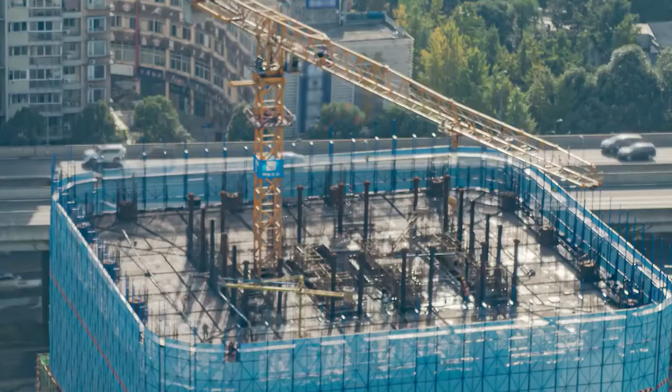Consider for a moment the organizational chart and the responsibilities of these projects, and you will see how these relationships become even more complex. Owners' increased need for tight financial control and quick project turnaround, coupled with concerns about the rising cost of litigation, are contributing to a change in the way these roles relate.

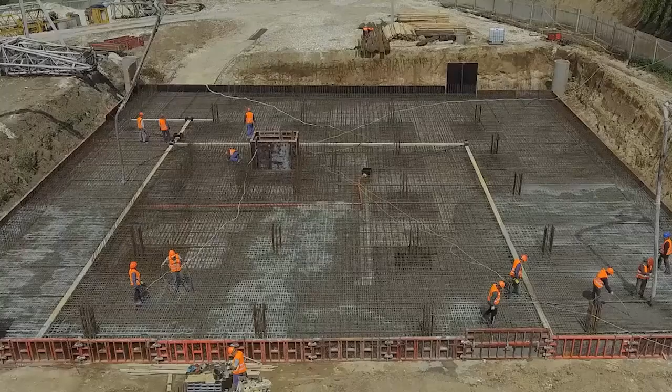So let's take a look at and try to break down each of these participants, and let's begin with the dreamers. These are the people who see a road where one never existed, a new ballpark, or a home to raise a family. Let's start with the owner.

Owners can be individuals seeking a home for a growing family, a large organization responding to a change in technology, a municipality seeking to improve its infrastructure, or a developer working to make money by filling a perceived market. The motivation to build is as varied as the profile of the individuals and companies seeking to build. Whatever the motivation, the owner is where the project is formed.

After identifying the need, the owner's most important function is to financially back the project. Otherwise, there can be no project. The source of that financing partly defines the type of participants on the project.

Over a quarter of the construction in the United States is done with public money. That money can be from local, state, or federal sources, but in all cases, the owner is the taxpayer. Because these agencies represent the public, they must follow specific methods of managing the project.

Public approval processes have to be figured into any schedule or budget. Designer and constructor selection processes are carefully spelled out. Negotiation of claims is well defined, as well as the payment of all invoices. There are special pressures on the team that is designing and building publicly funded projects.

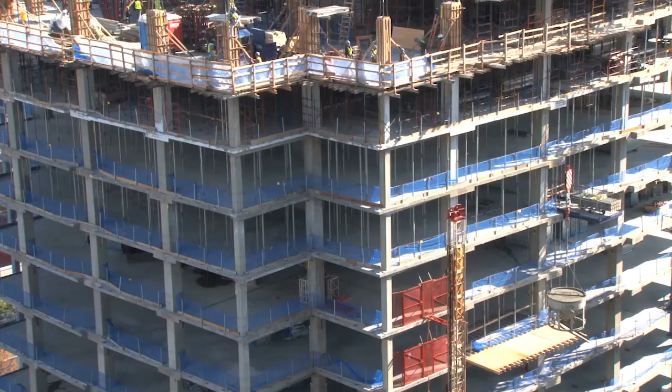Owners represent a specific interest during the project's life. While designers focus on functionality, aesthetics, and innovative use of materials, owners are concerned about the durability of the design, storage and availability of materials, simplicity of operation, and ease of maintenance.

Constructors are concerned with maintaining the schedule and budget through efficient methods of assembly and improved management techniques. Owners are additionally concerned about a turnover process that ensures a complete understanding of all systems in the new facility and a smooth startup transition.

This focus can put them at odds with other members of the project team who are very narrowly focused on the design and construction. In the best of teams, these diverging interests form a creative tension that encourages all members of the team to incorporate the interests of the owners as their own.

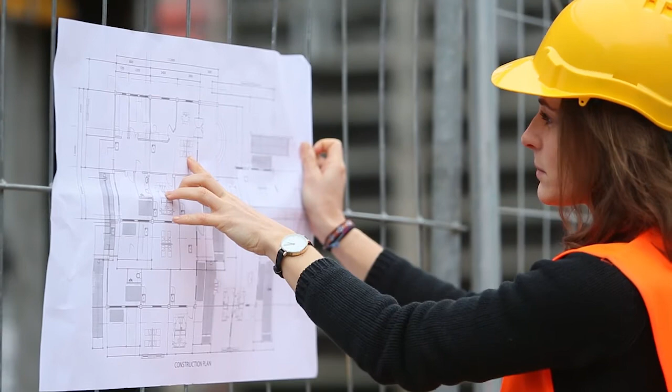Architects and engineers are the principal designers of construction projects. On most building and residential sector projects, the architect is the lead designer, laying out the concept on paper with the owner. The engineer is usually brought in after the basic concept is worked out, but before the details are developed. The engineer designs the building systems, structures, as well as mechanical, electrical, and plumbing systems.

On infrastructure and industrial projects, the lead designer is usually the engineer. The architect is brought in to work on the aesthetics. As an example, on a refinery project, the engineer designs the mechanical, electrical, and structural systems, while the architect handles the office spaces and the building color schemes.

Each professional contributes to projects in different ways. When architects are given a design challenge, they respond by first identifying the important elements of the design. For some architects, the physical context is the guiding feature. Others are guided by the activities that will occur in the building, and others still will focus on creating a unique image. Very good architecture responds to all three aspects.

The process is intuitive and subjective. Architects become known for personal styles they developed over the course of their careers. Some architects tie their work to historic styles. Others are more modern in their expression. They are hired to express those particular responses.

An engineer's approach to design is much different from that of an architect. Engineers tackle a challenge objectively, breaking it down into identifiable components and a series of questions to be answered. When engineers are the lead designers, the functional aspect of the work takes center stage.

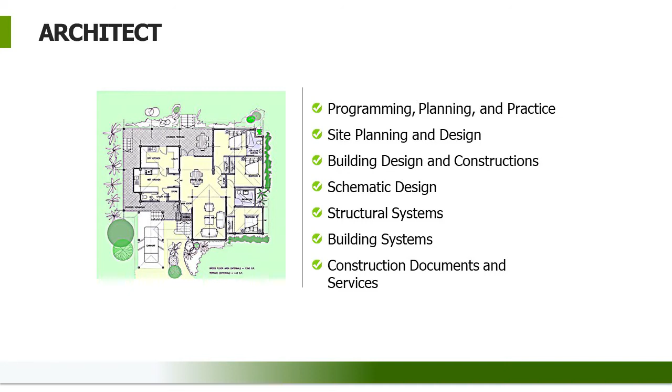Architects learn their trade through many years of training. There are bachelor's, master's, and even PhD programs. There is also a number of years a young architect must apprentice before they can take the architectural exam. The architectural exam requires an individual to show competency in many areas of construction, including programming, planning, and practice, site planning and design, building design and construction, schematic design, structural systems, building systems, and construction documents and services.

The field offers many opportunities. Architects can choose to practice as part of a large firm, a small partnership, or independently. They can specialize in one building type, as an example, residence, healthcare facilities, universities, sports and recreation facilities, or museums. The list is extensive. In addition to practicing architecture, licensed architects have other alternatives, working in other fields such as

owners' organizations, government agencies, teaching, marketing, and sales. Architects are usually the principal designers on building projects, but many other professionals contribute to their work, including specification writers, computer-aided design operators, interior designers, and landscape architects. These specialized professions developed as the tasks facing architects became more and more complex. Sometimes, especially in larger firms, those professionals are employed full-time by architectural firms.

In other cases, they work independently and are brought in as consultants as needed. In addition, these professionals can have their own independent practices and can be brought in by clients to work directly as principal consultant. When brought in as a consultant, an architect may be hired for any one of the following positions: lead architect, draft person, BIM operator, specification writer, interior designer, and landscape architect. Therefore, it is obvious that being an architect can lead to many roles within the construction environment.

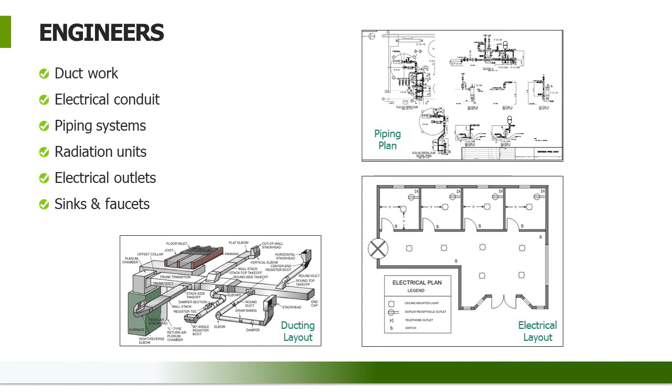Then the engineer must lay out the necessary distribution, ductwork, electrical conduit, and piping systems. They must also specify and locate termination devices such as radiation units, electrical outlets, and sinks and faucets. Because their work is detailed, communication within the design team is critical. Adjustments are ongoing in the design to accommodate the dimensional requirements of the building systems, and sometimes the work of an engineer can influence large shifts in the design approach.

Engineers are regulated by professional licensing requirements that include a 4 or 5-year college degree, a specific number of years of experience, and the successful completion of 2 exams, one being the Fundamentals of Engineering or FE exam and, after proper documented experience, the PE or Professional Engineering exam. The PE exam is typically divided into 2 sessions, the breadth exam and the depth exam.

As an example, the Mechanical Engineering exam is divided as follows: Basic Engineering Practice, Mechanical Systems and Materials, HVAC and Refrigeration, Hydraulics and Fluid Systems, and Energy and Power. The depth exam would include principles, statics and dynamics, and applications such as components, joints, and fasteners.

Engineers, like architects, have many career options. The most common are found in the construction industry, and they include structural engineer, mechanical engineer, electrical engineer, civil engineer, and surveyors. As you can imagine, and as you have probably seen, architects and engineers have different skill sets, and therefore differing opinions when it comes to priorities on the job. The person responsible for bringing them together is usually the constructor.

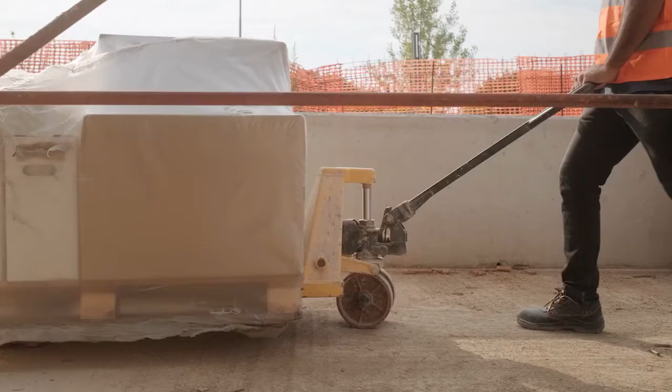From the time the first pencil is laid to paper in the design process to the completion of shop drawings and coordination drawings, the goal is to instruct people who actually perform the work. These are the tradespeople. The number of trades needed on the job has grown with the complexity of the projects.

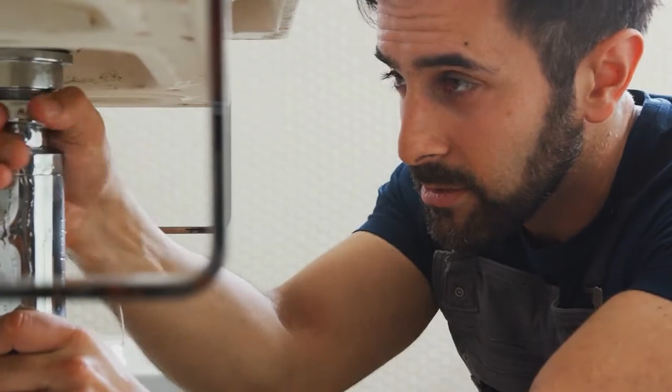Where once there were electricians, there are now also specialists in telecommunications and security. Where once there were plumbers, there are now also pipe fitters and sprinkler contractors. Most construction processes require specialized training. On complex building sites, as many as 15 different trades may be working on a given day.

The opportunities in the construction trades are almost unlimited. The U.S. Department of Labor lists the following job categories for construction trades: boilermakers, brick mason, block mason, and stone mason, carpenters, carpet, floor, and tile installers and finishers, cement masons, concrete finishers or segmental pavers, and terrazzo workers.

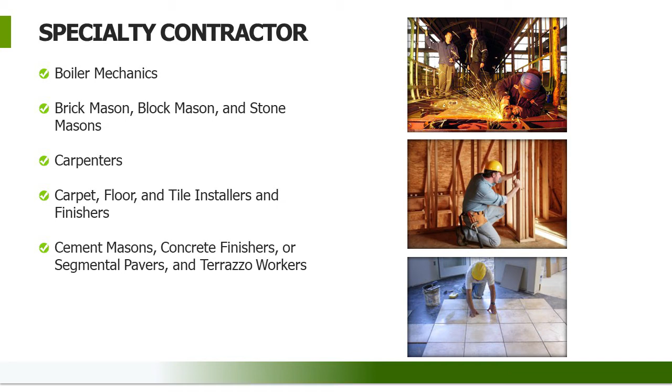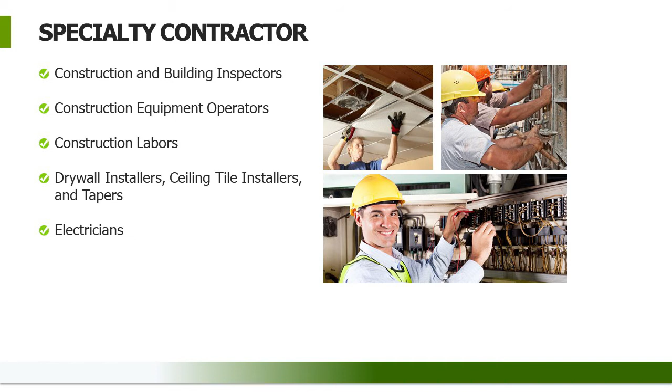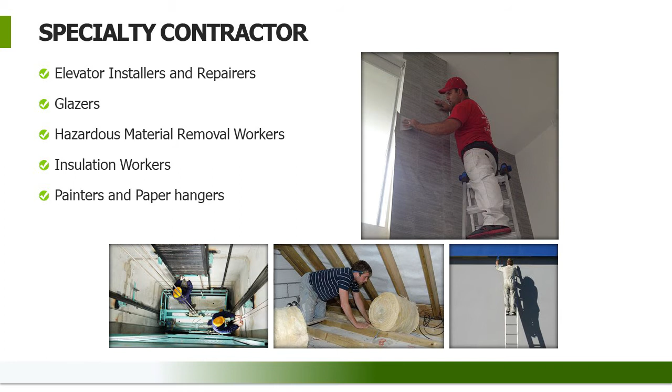Construction and building inspectors, construction equipment operators, construction laborers, drywall installers, ceiling tile installers, and tapers. Electricians, elevator installers and repairers, glazers, hazardous material removal workers, insulation workers, painters and paper hangers.

And finally, well, you get the idea. To practice the craft is to create a legacy for generations to come, manipulating materials, assembling parts, creatively using knowledge and skill to create better conditions for people. These are all part of practicing a trade.

At the end of the workday, an observer can see how those hours were spent. At the end of the job, there is something new for others to enjoy, sometimes for generations. Few jobs offer such tangible measures of success and enjoyment.

A project may have talented designers, innovative constructors, and wealthy, sophisticated owners, but without materials to build with, the project would be only a drawing.

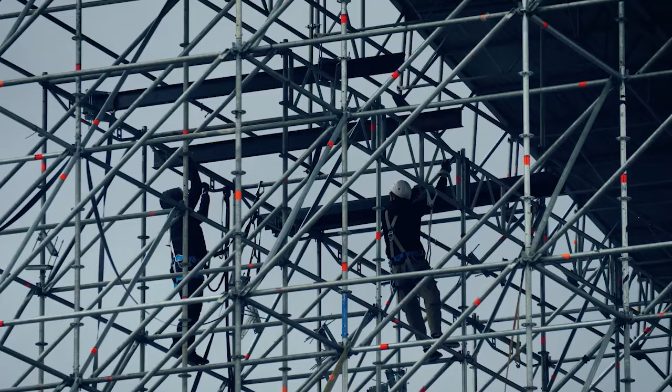Materials and building components are manufactured, fabricated, and installed by suppliers. A user's choice of material is based in part on performance, durability, and aesthetic appeal. But without the help of the suppliers and their trade associations, architects and engineers would be daunted by which materials to specify, and constructors by which methods of material assembly to use.

To promote their industry and provide information about material characteristics, suppliers have formed trade organizations that establish a level of quality for each product and standardize certain characteristics, such as dimensions or strength. The American Plywood Association is a trade association, as are the American Concrete Institute and the National Electrical Manufacturers Association.

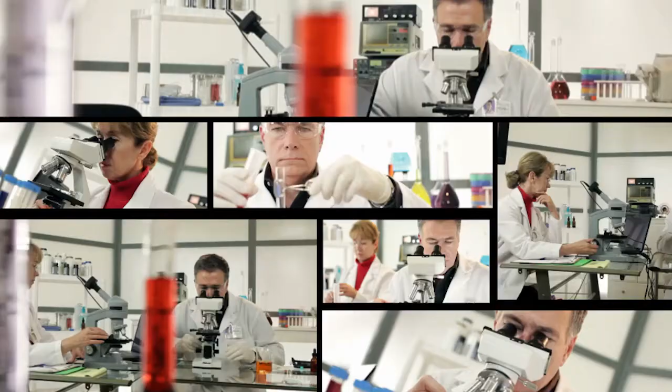Manufacturers of materials that fall within their categories support these groups. Through research, the association develops criteria that members then agree to use. To ensure the criteria have been followed, the associations provide oversight methods using seals of approval or some other mark, such as a stamp. Although they have no regulatory function, trade associations and their standards are often developed with other groups, such as the American National Standards Institute, ANSI. These standards are often incorporated into architectural specifications, government regulations, and building codes.

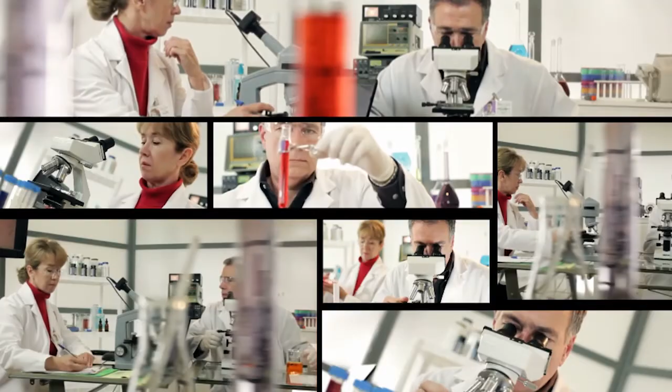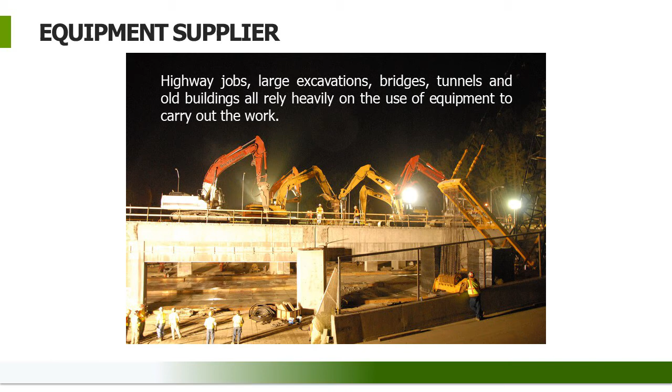Depending on the project, equipment can play a very big role in construction. Highway jobs, large excavations, bridges, tunnels, and old buildings all rely heavily on the use of equipment to carry out the work. A major difference between equipment and material is that equipment does not become part of the project when complete.

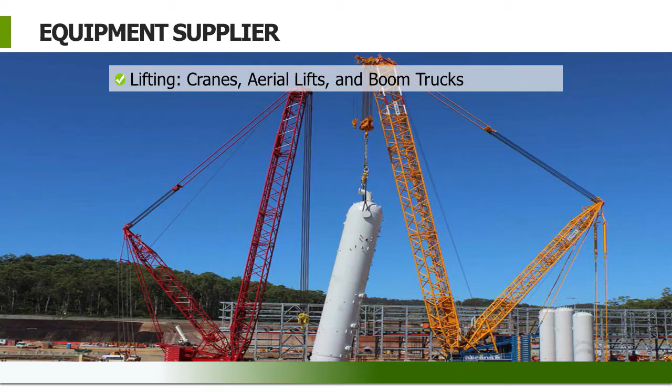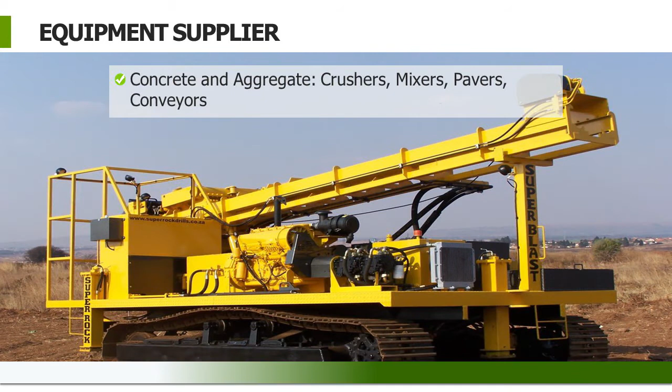Equipment types break down into six loosely defined categories: earth-moving, such as excavators, loaders, and trenching equipment; lifting, such as cranes, aerial lifts, and boom trucks; light equipment, items such as generators, pumps, and compressors; bituminous machinery, such as planers, asphalt pavers, rollers, and soil stabilizers; concrete and aggregate equipment, including crushers, mixers, pavers, and conveyors; and other components such as buckets, blades, and demolition tools.

Behind all the people who interact directly with the construction is a host of other people who are deeply involved in the project. Before a project even starts, many issues must be resolved.

Financing is certainly one of the biggest issues. Where the money comes from, how the funding is set up, and the terms and conditions of the funding all play a direct role in how the project will be managed. Many financial institutions are involved in funding construction companies, and some of the funding may come from government agencies as well.

Certain public agencies are interested in the project from a regulatory perspective. They have the authority to rule on the conditions of the building and can deny the right to build if the project is deemed not in the public interest. These agencies include zoning boards, planning boards, historical commissions, and building code officials, all locally administered and controlled.

The roles of design and construction firms are certainly different, but because both participants are project-based, they have some similarities in the way they are organized. Both types of companies are internally organized to support technical people such as marketing managers, accountants, information systems, technical support, and human resource personnel. For instance, a marketing manager's position would be described in a similar way in both companies, varying only in details.

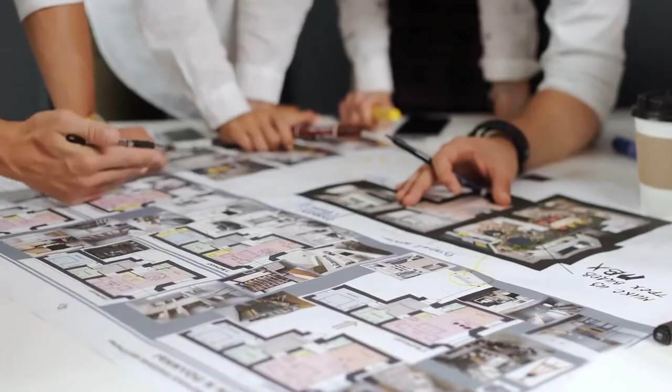So let's finish this presentation by talking about great job captains. The Roebling family as a group can be credited with building the Brooklyn Bridge during the period of 1869 to 1883. It was the greatest project of its time and required the use of technology at a scale never before tried. The concept of a cable-supported suspension bridge was literally invented by John A. Roebling.

Roebling was a man of tremendous energy and powerful intellect. He built a number of suspension bridges, most notably the John A. Roebling Bridge in Cincinnati, which is still in daily use today, that demonstrated the cable-supported concept prior to designing the Brooklyn Bridge. Upon his death, which was precipitated by an accident that occurred while surveying the Brooklyn Bridge location, his son Washington took charge of the project.

Washington Roebling was a decorated hero of the Civil War who had received his training in civil engineering at Rensselaer Polytechnic Institute. Like his father, he was a man of great vision and courage. He refined the concepts of caisson construction and solved numerous problems as the great towers of the Brooklyn Bridge began to rise above New York City.

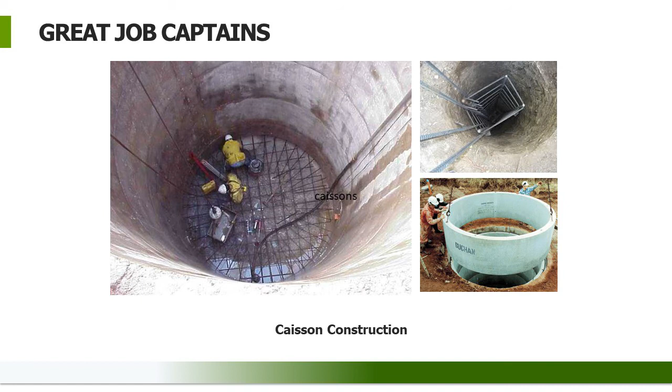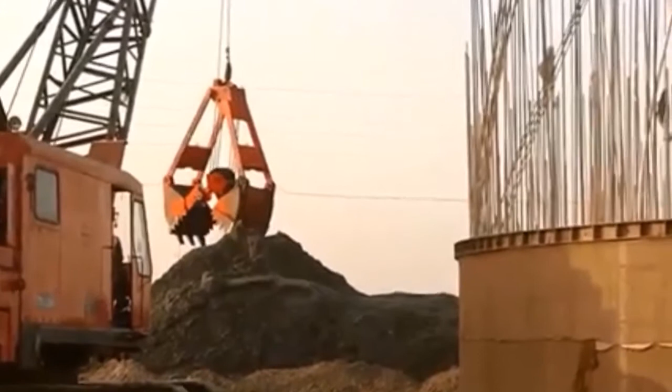Washington did not allow anyone to work under unsafe conditions. Therefore, he entered the caissons and supervised the work personally. He ultimately suffered a mysterious illness related to the fact that the work was carried out under elevated air pressure in the caissons. Today, that illness is called the bends, which was caused by the absorption and rapid exit of nitrogen from the bloodstream when workers entered and exited the pressurized caissons. This is the same illness that scuba divers have to be concerned with when diving.

Although incapacitated, Washington continued to supervise the work from his apartment that overlooked the site. At this point, Emily Roebling, Washington's wife and the sister of an Army general, entered the picture. Emily carried information to the supervising engineers on the site. She became the surrogate chief engineer and gave directives in the name of her husband. She was able to gain the confidence and respect of the entire construction team and was instrumental in completing the project.

Another great accomplishment was the Panama Canal. The end of the 19th century was a time of visionaries who conceived of projects that would change the history of humankind. Since the time that Vasco Núñez de Balboa crossed Panama and discovered a great ocean, great planners had conceived the idea of a waterway or a link between the Atlantic and the Pacific Ocean.

Having successfully connected the Mediterranean and the Red Sea at Suez in 1869, the French began work on a canal across the narrow Isthmus of Panama. After investing almost a decade into the project, the French were ultimately defeated by the formidable technical difficulties, as well as the hostile climate and the scourge of yellow fever.

During this period, Theodore Roosevelt became President of the United States. His administration decided that the canal project must be completed. Using what would be referred to as gunboat diplomacy, Roosevelt precipitated a revolution that led to the formation of the Republic of Panama. Having clarified the political situation, Roosevelt then began to look for the right man to construct the canal.

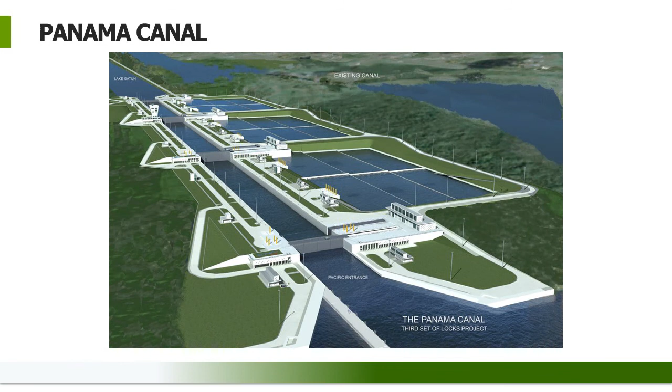The construction of this system of locks presented an enormous challenge, particularly on the Atlantic side of the canal. The situation was complicated by the presence of the wild Chagres River, which flowed in torrents during the rainy season and dropped to a much lower elevation during the dry season.

Stevens' qualities as a great engineer and leader were on a level with those of Roebling's. As an engineer, he understood planning must be done to provide a climate and environment for success. Based on his railroading experience, he knew a project of this magnitude could not be accomplished by committing resources in a piecemeal fashion.

Stevens took the required time to organize and mass his forces. He also intuitively understood the problem of disease had to be confronted and conquered. Stevens was able to be decisive and was not held in check by committee or bureaucracy back in Washington.

But then he did something no one expected. He resigned. Having set the course for what would ultimately lead to the successful completion of the Panama Canal, Stevens abruptly resigned. It was never quite clear as to why he decided not to carry the project through to completion.

President Roosevelt did not take the resignation well and reacted by appointing a man that Roosevelt said could not resign, an Army colonel and West Point graduate named George Washington Goethals. Goethals had the managerial and organizational skills needed to push the job through to successful completion.

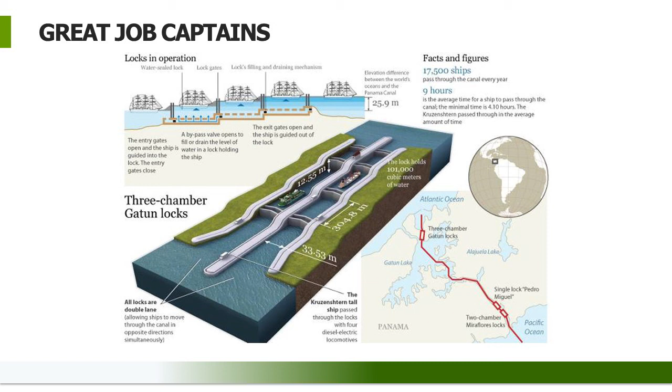As you can see, the people in the construction industry cover a wide range of skills, experience, and expertise. From apprentice carpenters to company executives, the one thing that they share is that passion for the built environment. The building industry is tough, risks are high, working conditions are often harsh, conflicts arise because of financial pressures, and safety is always a concern.

But when the right team is put together, challenges that seem insurmountable become surmountable, and the team can celebrate project success. And this concludes People on the Project, presented by Tech Training LLC.